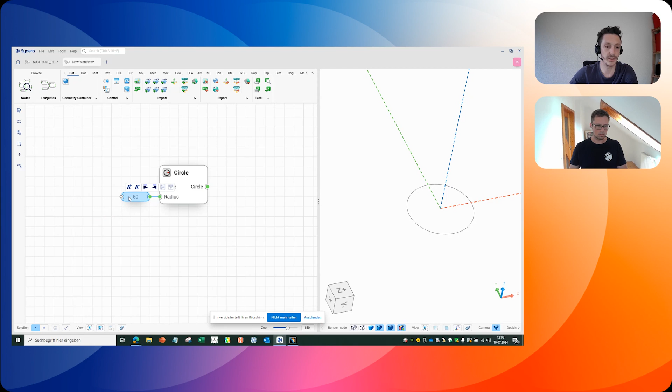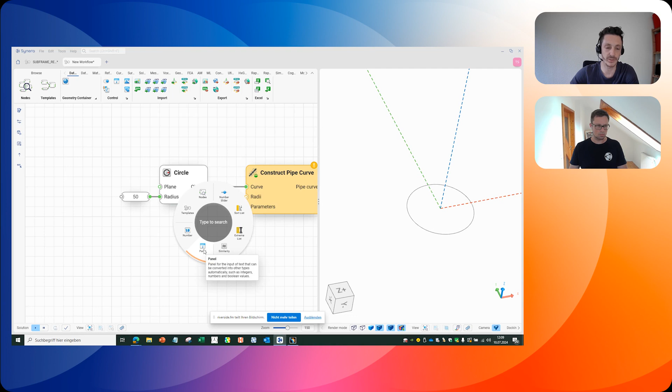Here's a predefined node for creating geometry, with the viewer on the other side. You can put in a few parameters like radii, and in the end create an easy geometry out of that, for example using different radii to create a circle or a ring. That would mean you can type in these few parameters and create a geometry out of it. That's basically the initial situation. On one side you always have the input side, and on the other side of the node you can access the output, which is created by the component itself. This is just an easy example for geometry creation.

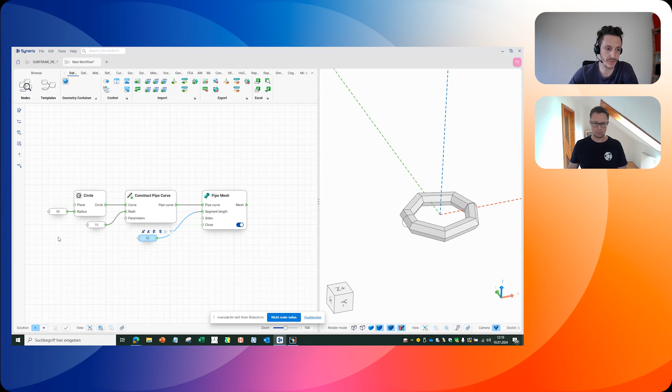We'll show something more complex in the next few minutes. But just to get an understanding of the current, or initial, way of designing these kinds of things: you have to be as parametric as possible. So you can easily change something in the beginning, just change it to another value, and you'll get direct response from the system in terms of graphics and so on.

And if it comes to, for example, a CAE analysis, FE meshing and so on, you can also use this geometry for meshing. Let me just get one more node on the canvas. This means you can use common solvers like ANSA, Hypermesh, and so on, and use that geometry later on for meshing and later steps in the workflow. So basically this is overall a combination of different software environments: on one side the CAD situation, on the other side the CAE stuff, and you also have these internal things of manipulating the input and output.

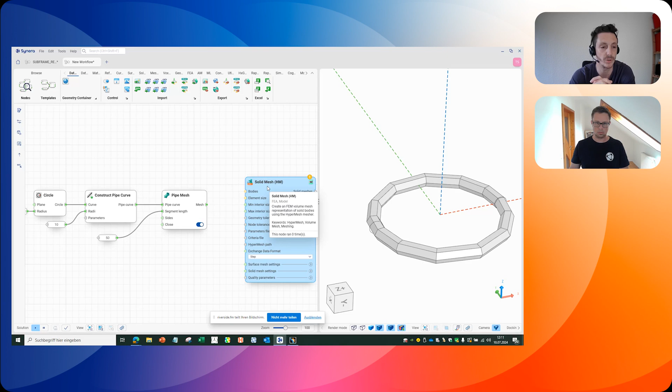As I said, we'll show that in the next few minutes in a more complex way, but for now, Tobias, do you want to say a few words more?

Yeah, so to sum this up in my own words, please Tilman correct me if I have a misunderstanding here. That means you're not creating geometry, meshes, and simulations by clicking. It's more that you're describing the process, and then you can reuse the process on your next project. Is this right? Exactly, that's it. You're creating the strategy for how to build a component, how to validate a component, or whatever is necessary for the project. For the next project, the next development phase, or the next concept, you can just reuse that workflow, maybe with some specific changes. Overall, it's easy to use these kinds of workflows and algorithms for the next few projects and so on.

Yeah, cool. So what you showed might not solve a typical engineering problem, as you already highlighted. There's more to show, so maybe you can show us a real life engineering project, how you automated stuff there, and what kind of value it created at the end.

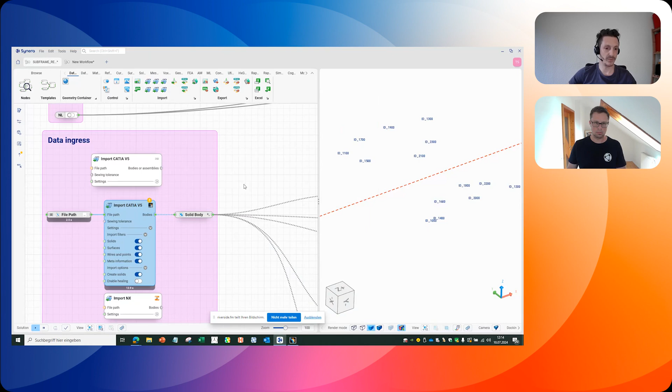And that's where we are jumping in with automation. I will share the software again, the platform, and guide through what we have done in the project, or in the workflow, to explain the different steps.

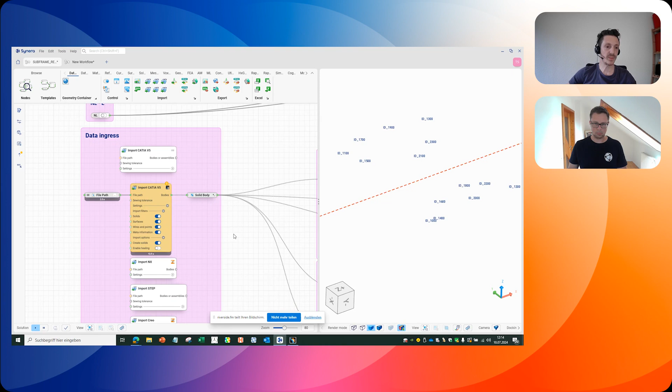First of all, you have to have a data ingress. It's not important which kind of CAD system you use. For example, it could be CATIA V5, or it could be Siemens NX. It could be a STEP format, it could be Creo, whatever. First of all, the thing is you have to import it.

That's basically an easy thing here. You just have to select the right path for the CAD file. You can also use PLM connectors and so on. This connection is basically just triggered by the saving process in the CAD system.

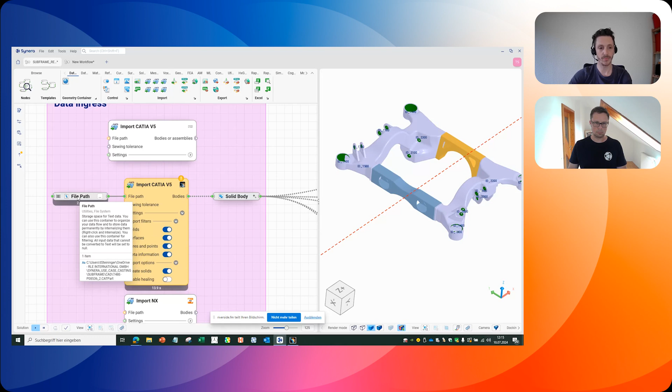After the ingress of the data, you have to run through all the different steps which are interesting for a proper validation of a component, meaning you have to mesh it somehow. As I already mentioned, you can use common meshing software like Hypermesh, you can use the ANSA mesher, or you can use an internal mesher in the platform directly.

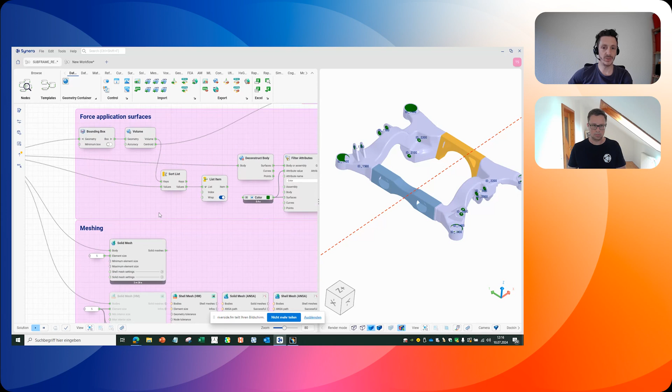And you have to tell the system at which point you want to apply some force, for example. In our case, this is just done by a color code, meaning for all the different hard points and force apply points on the component, you just need to color the surfaces for connecting later on.

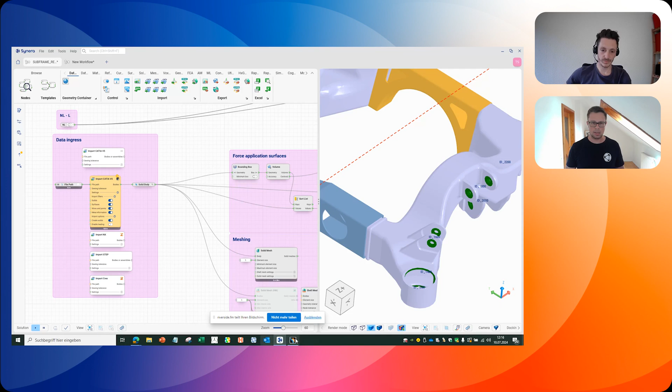May I step in here, because I have a super important question. So that means you can easily, in the CAD environment, design your part and then you have a specific color code. It looks like in your case it's green or some greenish color. And every surface I apply this greenish color to, there will be a load applied, for example.

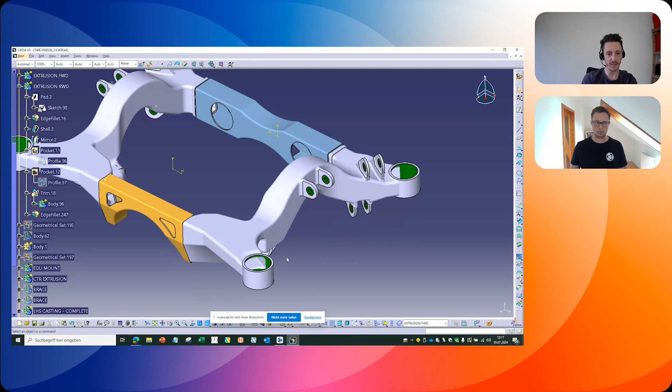So correct, for example, that would be one way you can do it. There are many other ways. It's just that you have to give the system a trigger point for how to detect the surfaces you want to hand over, basically, to the simulation. In our case, the easiest way was just to use a color code.

It could also be just putting the surfaces in the right container in CATIA. It could also be using coordinates, for example hard points, and it will search for the right things there. It could be a specific other component, meaning maybe in the end there would be a bolt coming through these things. If this is somewhere stored in the CAD environment, that could also be used for detecting the right surfaces. Is that what you meant?

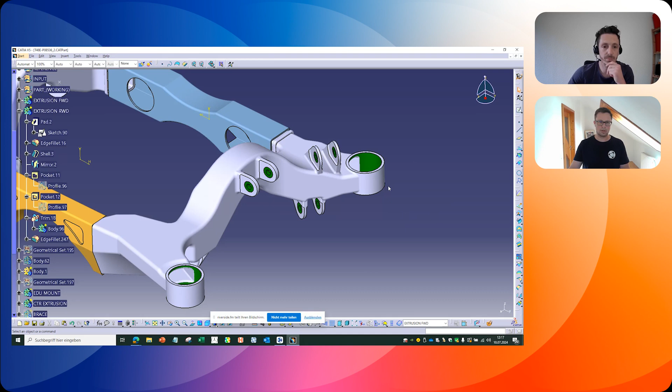Yes, exactly, that was what I wanted to understand. So can we do it somehow live, modifying the geometry or whatever, to see what's actually happening? I think that's what everybody's looking for.

No problem, I can do that. I changed just a little thing, but maybe just for explanation first, later on there comes the simulation. If I now do an update and start the workflow again, it will take a few minutes to run the simulation again. Maybe just to highlight that first.

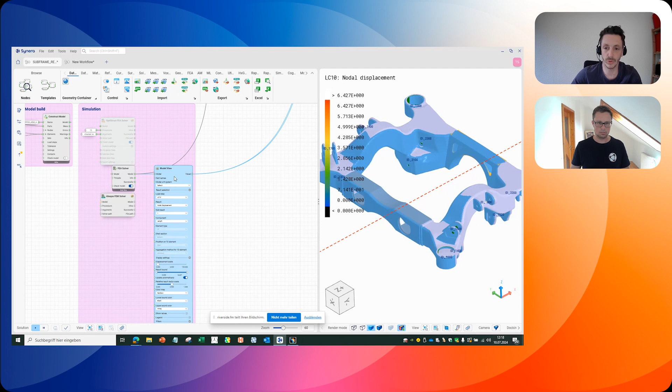In the end, there's a viewer for getting some feedback from the system in terms of stiffness, strength, and maximum stress. And then if I now do the change in the CAD environment, I have to just update the data ingress. That means for that step, for example, I will just change an easy thing. Let me just see if there's something I can easily change.

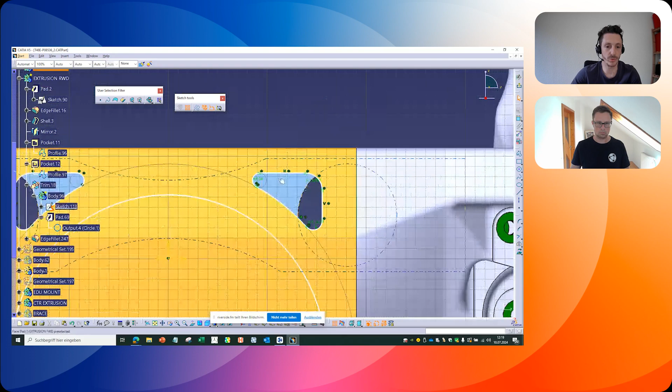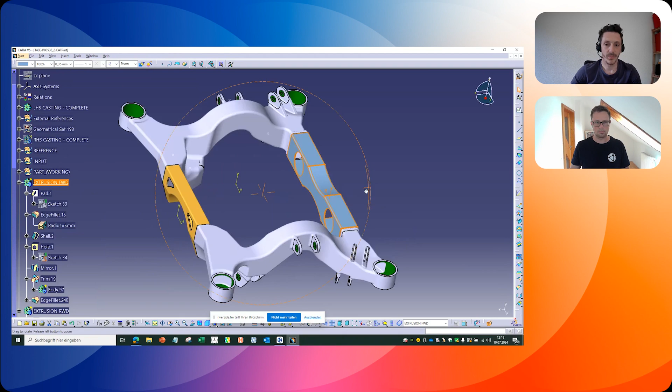For example, I want to change the whole data here, or that could be just an easy one. Just run the update later. Maybe there could be something more interesting. Maybe I can cut the hole through somewhere else, which is also not that complicated. Maybe my design skills are not the part of the meeting in the moment, but that's just to get an easy understanding of what we want to do here. So just let me cut something through the component.

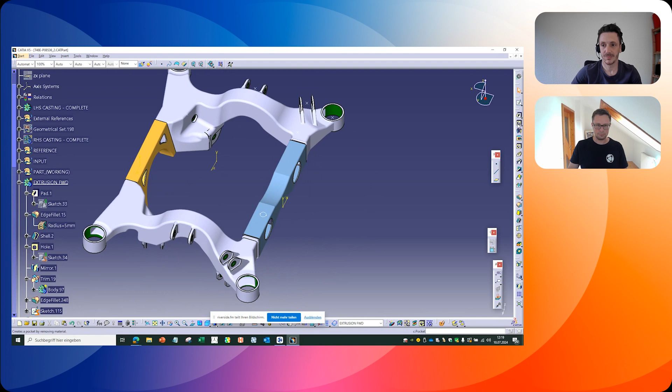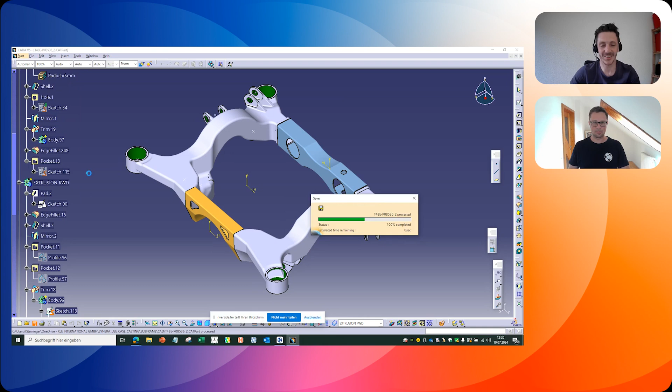So an easy change here. Maybe I can cut another hole through here also, so we can see a little more. I think it's good enough, so that should be enough. Principle is clear. I changed something, just cut the through holes more through the component. So that's it basically - geometry is updated, geometry is saved. You just have to hit the data ingress again. It took a few minutes to update, a few seconds to update.

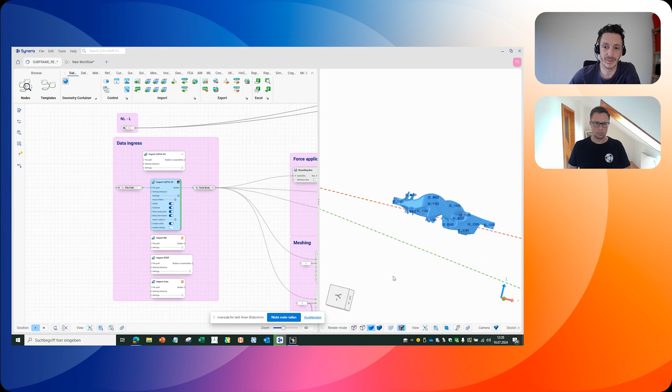So is the geometry already then updated now in the platform? Give me a second, it took a minute. I have to wait for it.

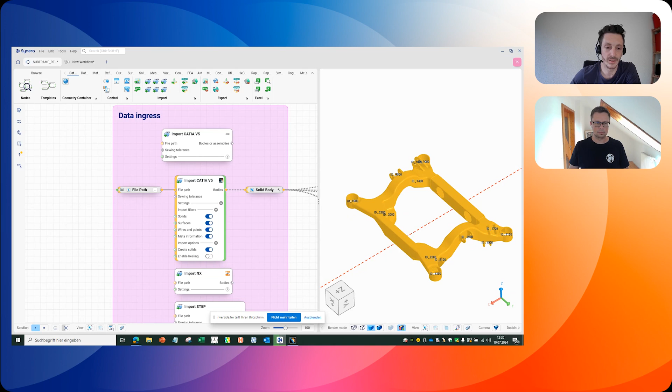And so in the meantime, I can guide through the rest of it again and just show the other steps of the project itself, of the workflow itself.

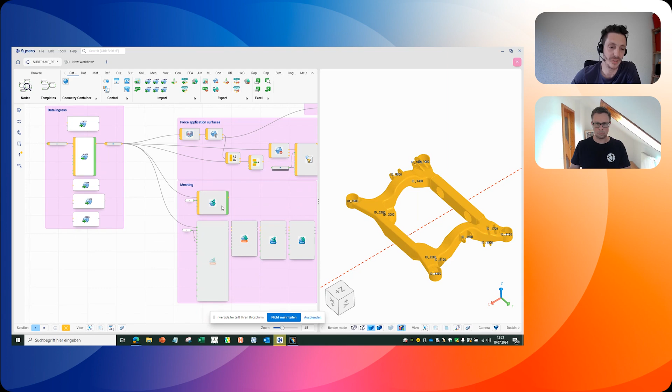Okay, so the major thing is first step would be the data ingress, and the next thing then would be just to mesh the component itself. That means there's some meshing nodes below here where we have to select the right geometry.

Sorry, I'm a little confused now why it is not working. Let me just open it again. That's not a big thing here.

So this is really a live event. That's how engineering projects are looking like. Sometimes everything goes fine, sometimes adjustments are required.

That's it, so choosing the right component. And now we have to wait a second until the component appears.

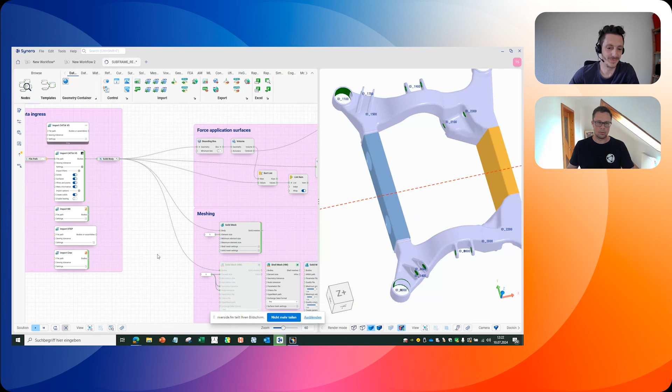So you save the part and now you try to import it, right? Exactly, that's it.

I checked it several times before the meeting, but that's exactly the thing of a live session. We have to wait for the update now. I guess it will appear in the next few minutes. I don't think that there will be an issue, but let's wait for it.

I will guide through, and later on we can look at the results. Okay, so while waiting, that means you save the part in CATIA, you re-import it, and then the whole process runs through.

What's here the added value, for example, for the CAD engineer? So the major thing behind is that every single change, as I already did in the CAD system, every single change will just create another version and another validation loop.

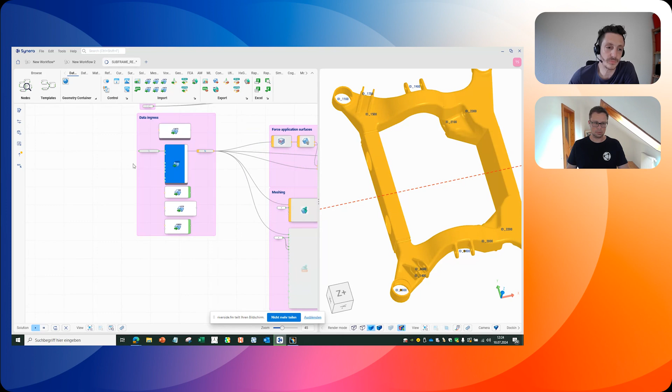And the thing behind is, if we want to check all these different concept steps, that would mean that every single concept has to be validated by a CAE guy out of the CAE department. And this took way too much time.

So now it appears, we have the hole in here, we have the changes in here. Now we have to wait for the meshing and so on. But this took time in the workflow. So I'm glad that it works finally.

I think it was just the wrong path I selected, but fine. So basically, that's the major thing. All the different changes in the several components will create another simulation loop, and that causes way too much time lag, basically. And this is what we want to solve with automation.

Every single CAD designer has the option to just check his design, his concept on his own, and that makes it way more efficient than the conventional way, where it took days or maybe weeks just to get the validated concept.

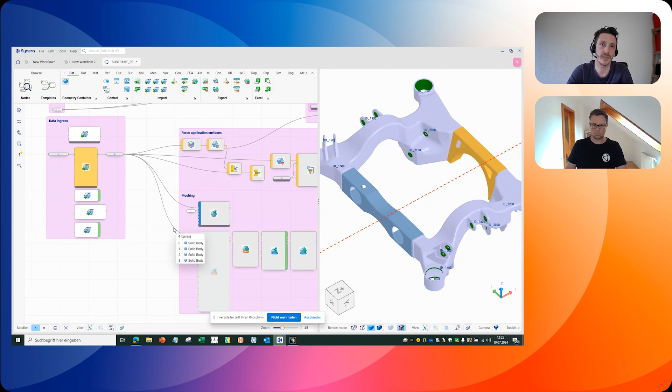In the meantime, there's basically nothing happening for the component, for the concept, and so on.

Also for checking all these different little steps, it makes it also for the customer much more interesting, or it creates much more information for the customer about which change does which reaction on the system itself. So that's, I would say, the major benefit of using a workflow like this.

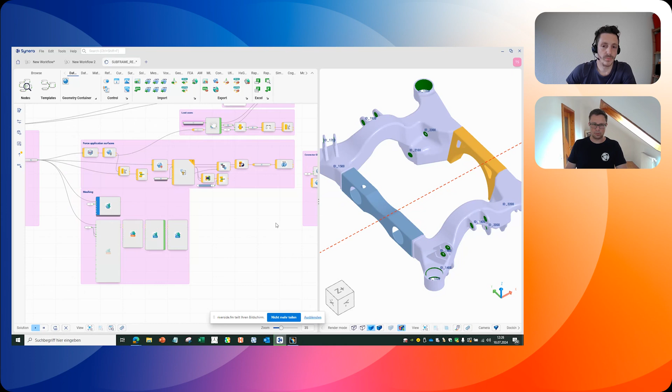Okay, so when you're showing a workflow like this, then I assume you have already used this workflow in several projects. So can you tell us a little bit what was then the impact based on maybe some rough KPIs on the project itself?

The major impact was saving around 25% on the CAD side, just from better utilization of the CAD resources. Several resources are utilized much better, and you can run different concepts without waiting time. So on that side, it's around 20 to 25% which we saved on CAD side.

On the CAE side, for the validation guys, we were able to save around 35%, because we're reducing the sheer amount of CAE work later on. All the huge CAE loops become much smaller, or you can maybe completely cancel one out of the development phase, which reduces the amount of work on the CAE side. So CAD side around 20 to 25%, CAE side around 35%, which we saved by using algorithmic development on these validation processes.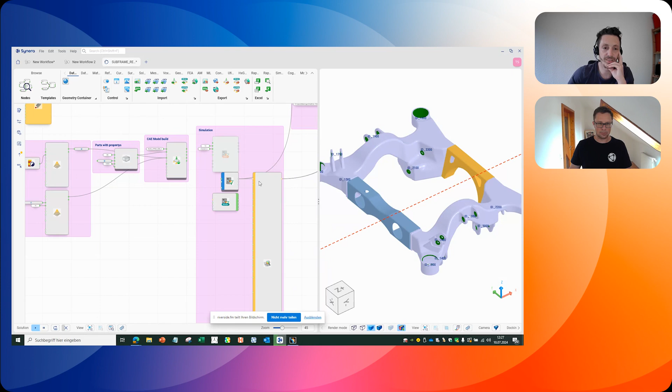Okay, so it looks like the workflow is still running. We are in the solver run now, it took a little time for the meshing. Maybe I can highlight that first to show what is happening there. In the beginning, as I said, it was just the data ingress.

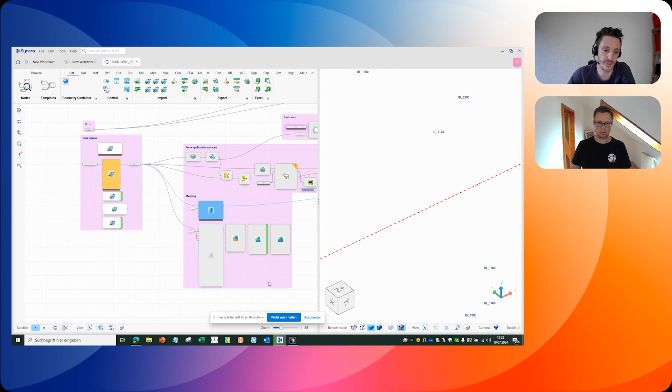Then we have to run some meshing here, meaning all the different geometries have to be meshed in the platform. You can use specific and common measures for doing this job.

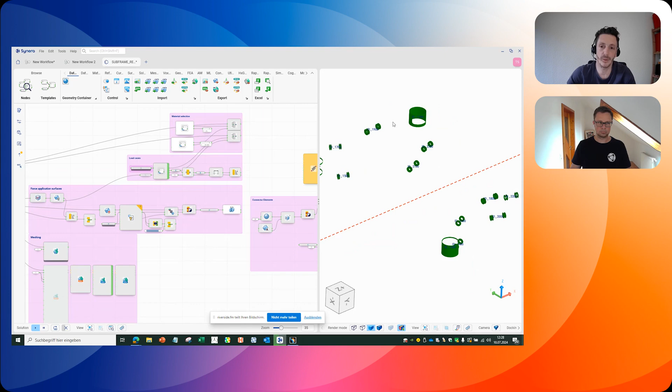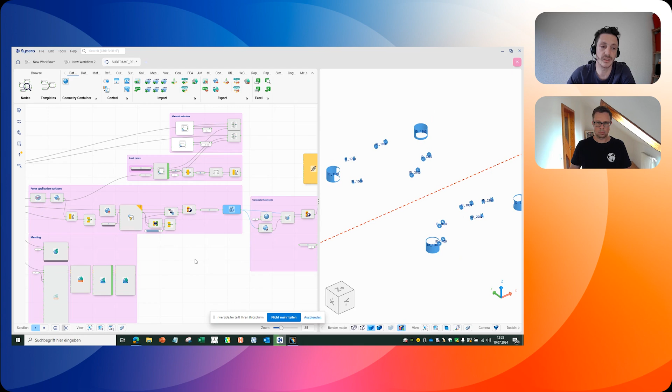Then the other thing was creating the connection, so all the different areas where we want to connect a feature to the component or apply force to it. You have to select the surfaces, and this is also optimized here, meaning the green color code is automatically chosen by the algorithm.

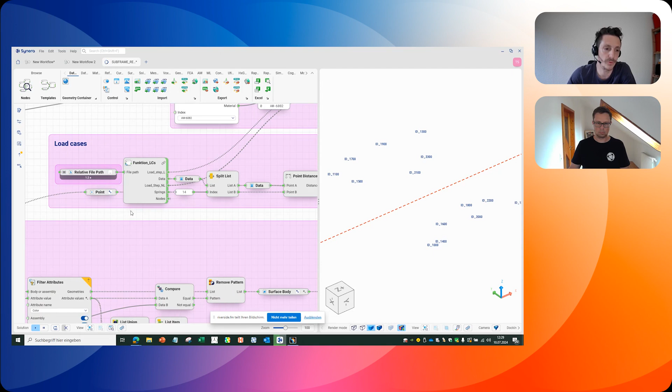All the forces are then applied using an Excel file. All the load cases stored here are given, for example, by an include file, but also possibly by using a huge Excel file with all the different load cases. I think in this one it was 20 load cases for the component itself, so a few different simulations which have to be run here.

The next one is material selection. You can choose linear material, or you can use non-linear simulation and non-linear material, which is necessary sometimes. Also for the CAE model build, if you want to use a non-linear simulation, the model creation has to be a little different. This is just something you can easily change at the beginning of the workflow.

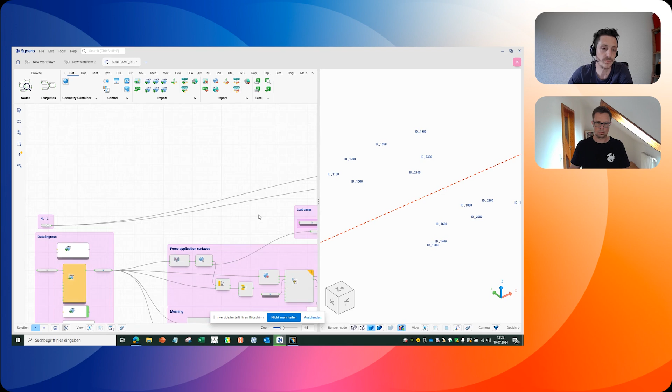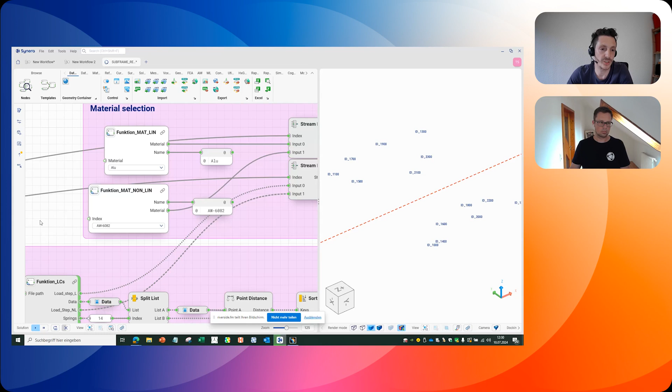Also, the simulation takes a little longer if you want to run a nonlinear simulation. It took, I'd say, for this component around an hour. I don't want to waste time right now, so I just switched to linear, which makes it even faster.

After material selection, you have to build some connections, meaning the different hardpoints have to be connected with the component itself or the several components in the assembly. This is basically the common way, like in every CAE software it would be done.

You can choose RBE3 or RBE2 elements. You can also use bushing or spring elements. You can do a combination of both, having RBE elements on the outer side and bushing elements in the middle, whatever. So basically, you are completely free to create here.

After the model creation, the typical CAE model creation, you have to choose a solver in which you want to run it. It could be Abaqus, OptiStruct, or the internal solver. You can also use other software, like LS-Dyna or PAM-Crash, through easy scripting connection.

Then the validation process runs automatically, meaning that simulation took a few minutes, as far as I know it was 5 or close to 6 minutes, so it took a few minutes more.

Then you can access again the viewer, so that colored plot with all the different load cases, which you can select by a dropdown. You can change to look at the stresses, and if you have the nonlinear simulation, you can also access the strain data, displacements, and so on.

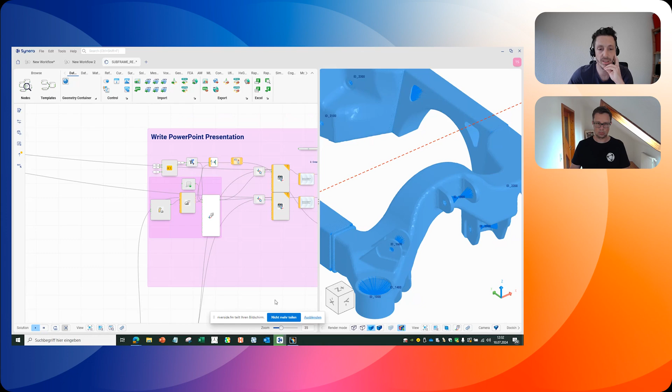This is something you can automatically create and report from, also for the several stress plots for the deflections in the component itself. This is something you can automate and run a few nodes to create a PowerPoint output here.

That's super awesome, as everybody hates to create PowerPoint reports, or at least I hate it. At least on the CAE side, sometimes it took longer to create a PowerPoint report than running just a simulation. That's a huge time waste, creating just PowerPoints, and in the end it's just for having a short look on it and then creating the next concept. So if this is properly automated, I think that's something really, really helpful.

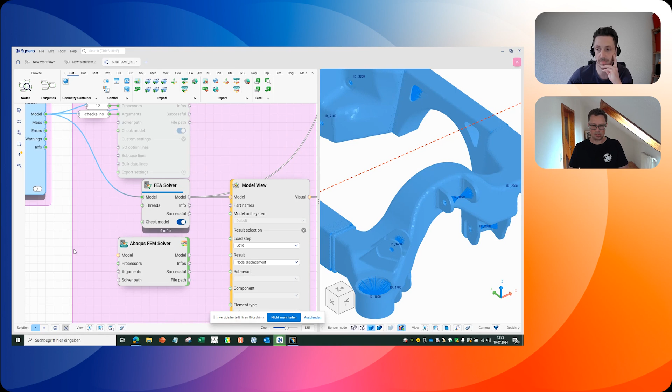So just a few steps left, and then the simulation is done. After that, I can show the results. Maybe while we are waiting, we can talk a little bit about what's next, as we are already running almost out of time.

As mentioned at the beginning, the idea is to host more of these sessions. So once a month, or maybe even twice a month, we want to show some kind of automated workflow. This time we chose the chassis part, but this could also be an electric engine, or even something totally different, but still following the same principles.

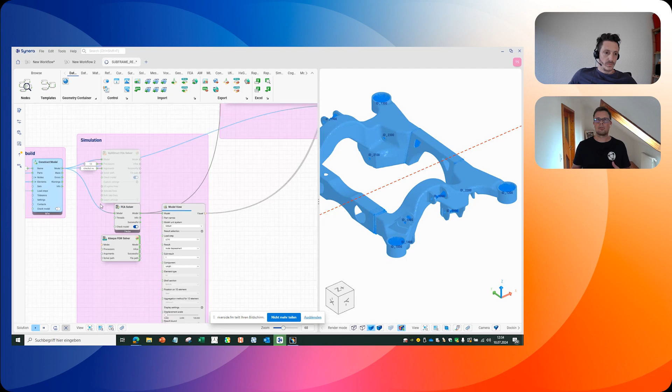We want to include maybe also some AI functions here, as everybody's talking about AI right now. There's also something else planned from my end. I want to create some kind of learning session to build real engineering examples. This will be a YouTube series every week. We will start next week with a simple workflow, and then every week we will continue to increase the functionalities of this workflow. This is what you can expect next.

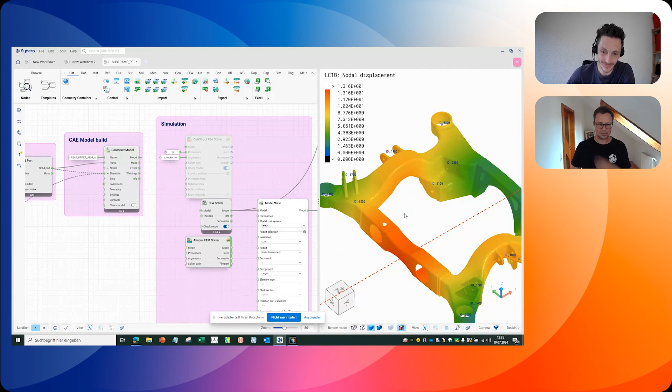Thanks, Tobias. Finally, just in time I would say, results of the components are done. So basically the simulation is ready, and you can just access now the several load cases. You can have a look at stiffness, strength, things like displacement, also on stress and strain later on if you run a nonlinear simulation.

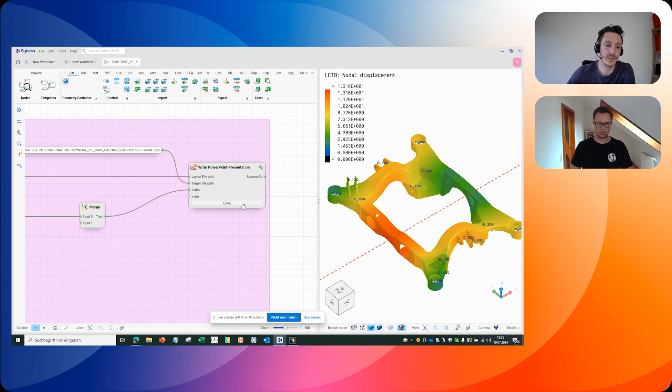But, and this is something I can show in the last minute, the reporting. It's just an easy example here. We have created a few pictures out of the component itself with some reporting behind. This means if there's an update in the component and in the simulation, it will directly create the same pictures again with some deflections for specific load cases. This is something which could be easily manipulated in the end.

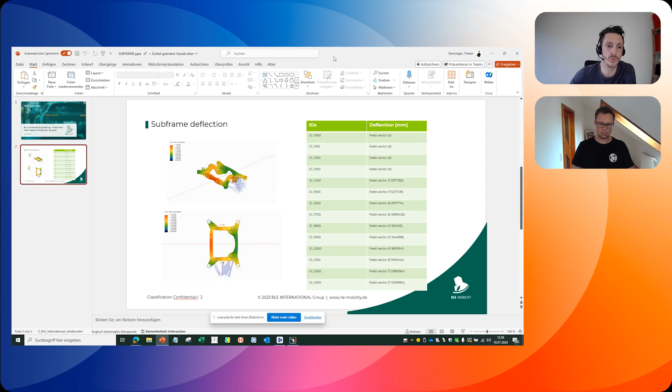So different views, direct look on hotspots, specific deflections on specific points, overall modal analysis, whatever. This is basically a free to use and easily accessible tool for running reporting in the end. Basically that's it. A few minutes wasted in the beginning, but now finally this result is done.

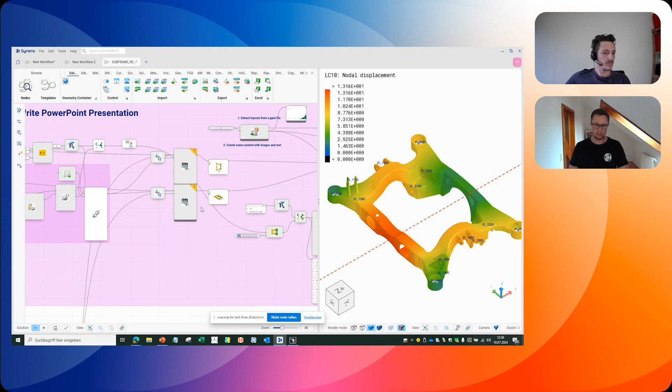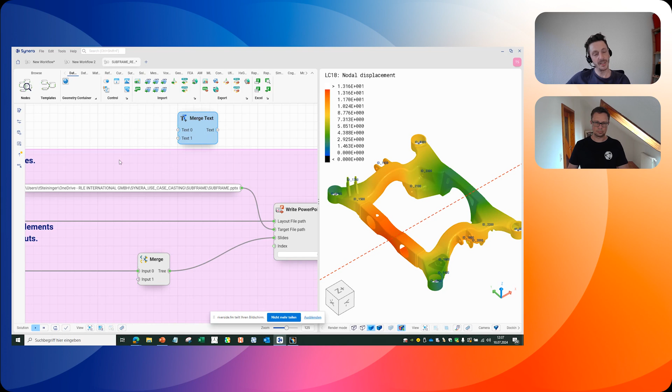One last question on the PowerPoint reporting: does that mean you're using it with the whole component or system history, just adding slides with every run, and then you can go through and see the history? Exactly. For example, if you want to create just a single path with a component name or whatever, you can also integrate some merge text functions, by just creating an easy update with a counter or with a timestamp, whatever. So this could again be customized as you want.